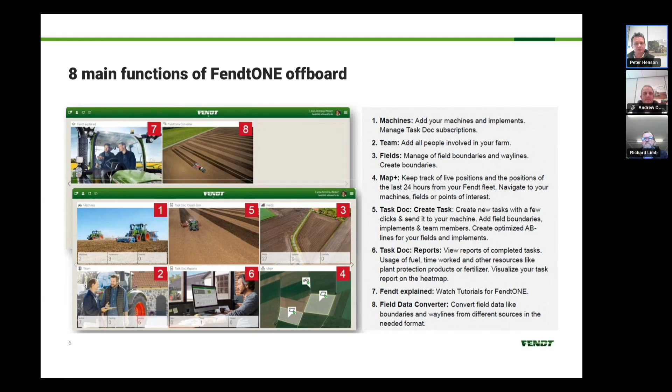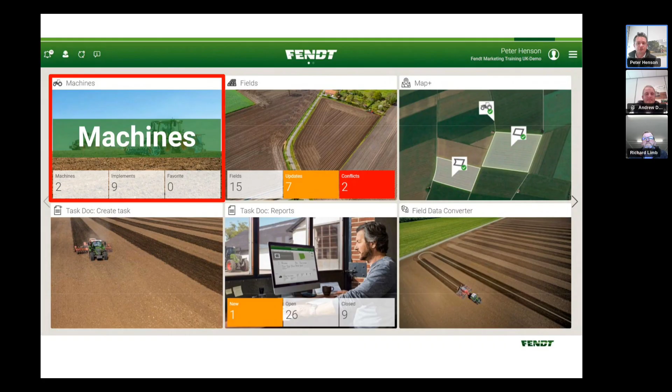So if we take a bit of a dive in, we'll have a look at our machines tile. As I said, in the machines tile we're not just seeing our Fendt machines, we can also see the implements. In this screenshot here we can see we've got two Fendt tractors. I can see they're connected to the telemetry system, so I can see their current hours, their fuel level, and their AdBlue.

We also can see we've got some implements in the list. Down the side we have a few buttons where we can import or filter out any of the data. If I click on one of the tractors, I get an overview of the tractor data there: serial number, when it was manufactured, and again the hours on the machine. We can see that data.

Along the top there we have some tabs, so we can look at whether we've got any servicing or warranty contracts on there. Down the side we have 3 buttons: one with the star, so you can set that as a favorite. Then we have the middle button, where we can actually click in and go see the live location of the machine. And the third button down is where we can hot link into the telemetry website.

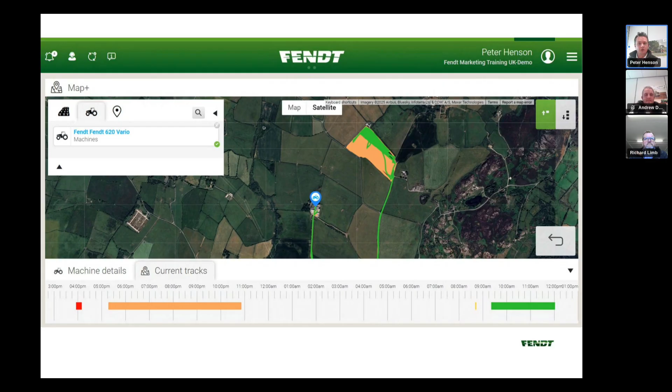For the implement side of it, this is where we can build up this database for our implement. Ordinarily this data would live on the tractor terminal, so this just means we can have security of our information. If the tractor gets traded in, we've still got all the implement data there.

Hidden, contained within the implements, would be information such as the guidance offsets that the operators have put in there. So that can all be held in the offboard portal, and this can be shared with other tractors, so only one operator has to do all the working out of their implement offsets. They can share that with other tractors. As tractors come and go within the fleet, this information is held, and we can then share that back out.

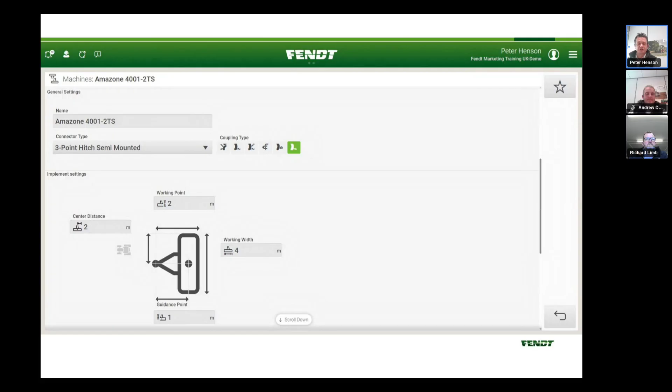Probably one of the real big tiles to look at then would be the fields tile on here. So when we're looking at this screenshot, we can see the number of fields we've got, but then we see these two other options that say updates and conflicts.

Conflicts is when we've got one field, but there are multiple boundaries for that field, because it could be the situation where we've got 2 or 3 tractors. They've all individually gone into a field and recorded their own boundaries, but it's all under the same name. So this would be displayed as a conflict, and it just means then that we can manage those conflicts. We can choose which is the correct boundary for the field, get rid of the other boundaries, and then share that one boundary back out to the remaining fleet. So again, we're always working off the same boundary.

The other bit of information is updates, and this will always relate to way lines or obstacles within the field, and it's then how we choose what to do with those.

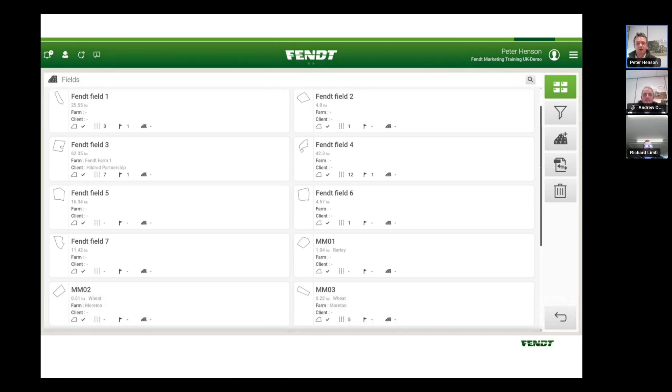So when I go into the fields tile, I see the list of fields that I have in there. I can see whether there's any updates for those fields. I've also got the option to add a field at that point, whether it's importing data off a USB stick, or even if I wanted to manually draw around a field, I could add that one in there.

But when I click into the field, this is where I can start to manage some of the field related data. So when it comes to managing the way lines, any new way lines will come through as an update, and we can choose how we manage those updates. I can either accept or reject those way lines, and it means when we share this data back out, we should be overwriting what's already existing on a tractor and removing any way lines we don't want, such as some of those temporary ones that were just done for a basic cultivation.

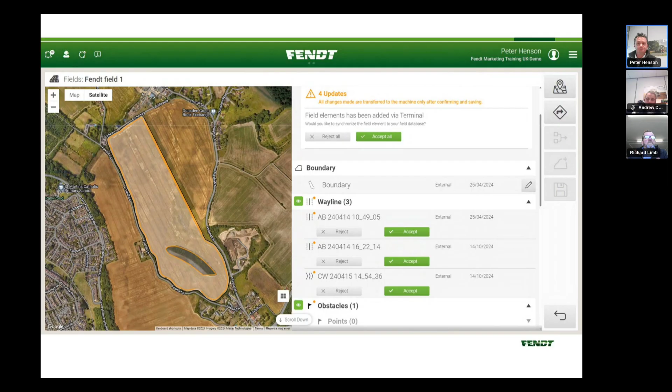But also within there I could edit the field boundary if I wanted to, so we can see all the various recording points as the field boundary was recorded the first time round, and we can push and pull those markers in or out if we want to alter the boundary.

I can also, for any of my preferred way lines, if they've just been left with the standard naming structure that comes on when the tractor's created the way lines, if the operator hasn't already labelled it up, there is the option to click on those way lines and actually edit the name, if that's going to become a permanent way line that you want to always use.

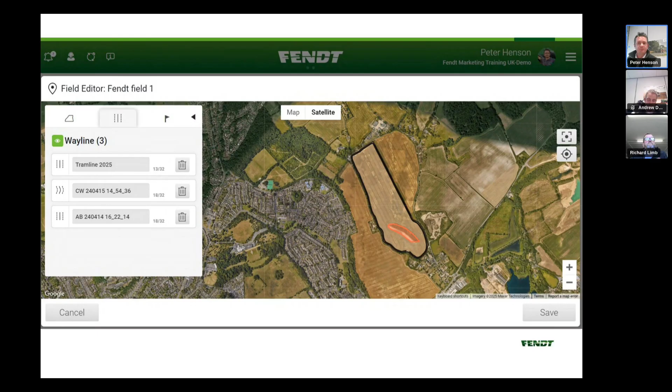And then also in there we can choose where we want to add in any obstacles, whether that be a point obstacle, a line obstacle, or mark any areas, whether it's a wooded area or a pond. Much like how we create boundaries, we can draw around those sorts of obstacles and share that back out with the tractors as well.

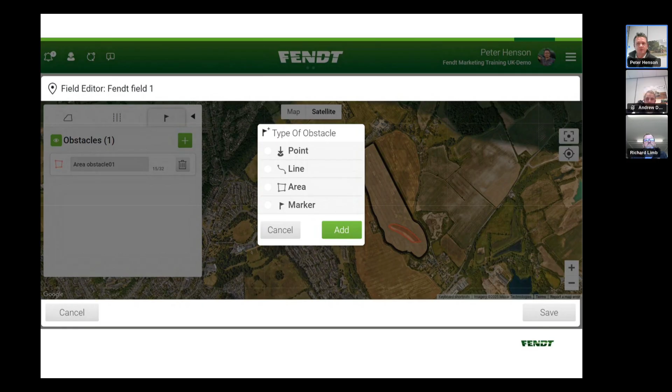And again, if a tractor's recorded this data, we can manage it. So if they've dropped markers or points within the field, we can choose how we manage those. It just means that if one tractor's added a feature into the field, it's another way that we can quickly share this information out with the rest of the fleet.

In here is where we can start to capture some of the information as to when we're out working within the field. So as I said, we could either have a two-way conversation with the tractor out in the field. If I'm having that two-way conversation, I'm coming into this create task tile, and it's a really straightforward process as to how we capture that data.

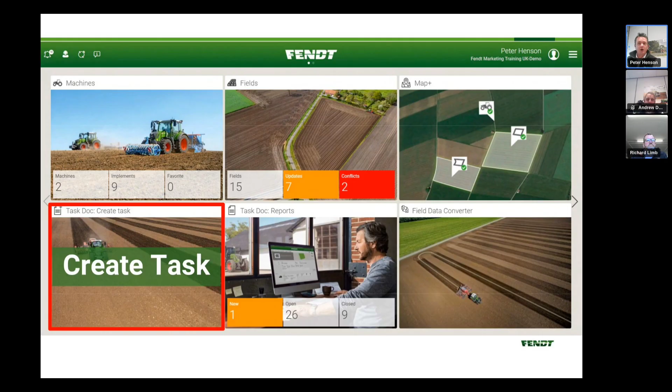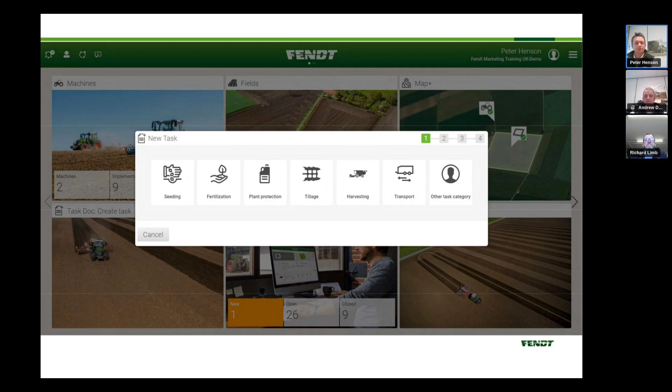Usually the first thing it's going to ask me is what type of operation am I going to do? So I'm picking out of the list there, or I could go to choose another task category. What it does then is just starts to filter out the machines and implements that I see in the next stage.

So depending on what I've chosen, if I choose the tillage task, it's only going to show me tractors that are in the list there. So if I've got a rogator or an ideal combine in my list, they wouldn't be shown, because they wouldn't be related to a tillage task. And then I can see all my cultivators as well. So I can make the choice as to which tractor I want to send my task to, what implement is going to be used, and then I can select various fields that I also want to add to the task as well.

When I advance from there, it asks if I want to tag a crop to this particular task, so I can either choose to add a crop there or skip past this step. The final step brings me to a summary page where I can see exactly what I've chosen for my tractor, the cultivator or machine I've selected, and the field.

At that point I can choose to edit any of the information there. I can also change the naming of the task so it can easily be identified by the operator, and I can add in any notes I want to send out for the task - whether it's to work fields in a particular order, or start at one end of the field and work in a particular direction.

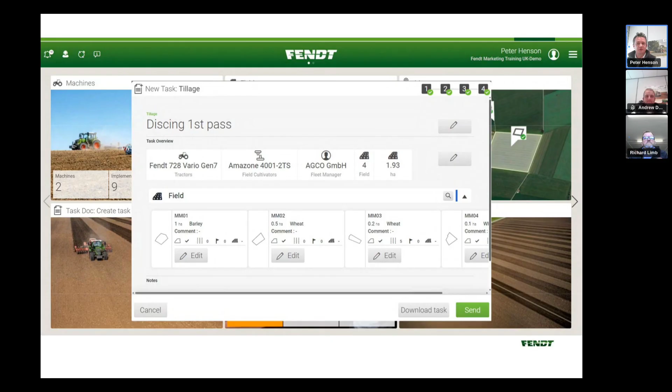But ultimately, once the tractor has finished the job, we want to get that data back. So regardless of whether we've created the task on the portal, or the operator has manually created a task on the tractor screen, when they've completed that task, what they do is what we call 'book it' - that closes the task off on the tractor screen and sends the data back to the offboard portal.

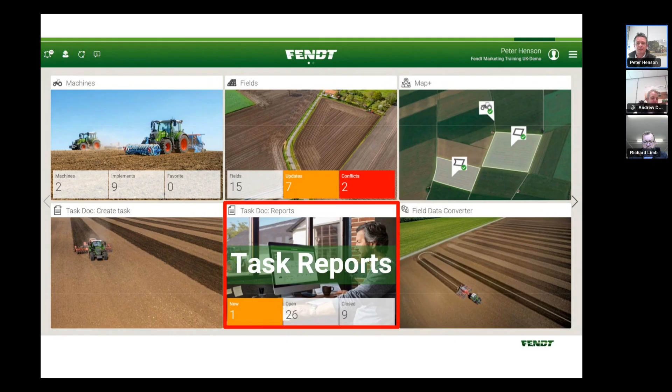So in here I can see whether I've got any new tasks - they come through as a little orange box saying how many new tasks I've got there, and then I can click through and see what data I have.

When I come through to my task list, I see all the jobs that come through, and any new tasks would appear at the very top of the list. On this side I'll have a report per field.

When I click into one of those reports, I've got all the basic data that the tractor has recorded - the field, the boundary area of the field, the start time, the stop time, and the date the work was done, both when it started and when the job was closed. Sometimes some jobs might go over multiple days.

More importantly, I can see what the tractor has done - for example, in this particular field it's worked 4.1 hectares. I can see how efficient the tractor was, how much of the time it was effectively working, and what my ineffective time was - usually ineffective time is turning on the headlands, or otherwise not working. I can also see how much fuel was used in that job.

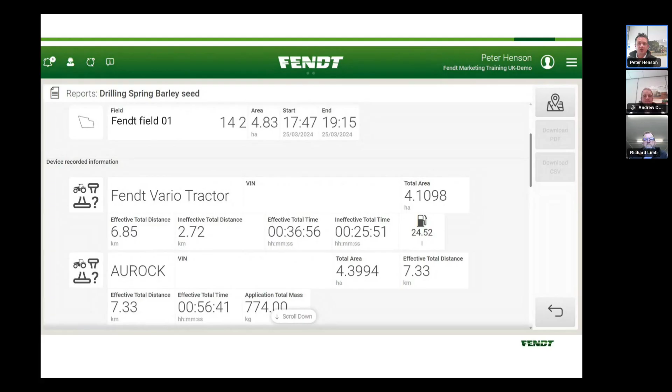Within that information, I can create what we call heat maps. This pulls out from the task details as to what's been done, and it will show me a variety of tractor information. So here I've pulled up fuel consumption for the tractor, and as an example, I've picked up some of the Isobus information from the drill that was used.

We can display these two maps side by side if we want to, and again we can zoom in on there, and start to maybe look at any features in the map that we maybe can't explain.

So for instance, looking at forward speed, if I knew the tractor was working at a consistent speed during cultivation, are there any spots in the field where it all of a sudden slowed down for an unexpected reason? Those areas of the field might want a little bit more investigation.

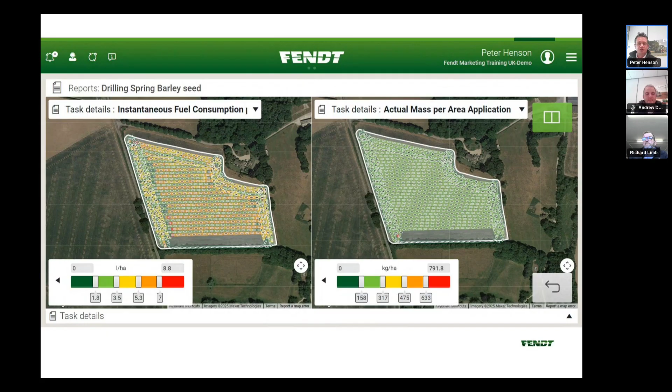Once I've captured that data, I can choose to export it if I want to. When exporting the data, I can choose what format I want to export it as. So I could choose a CSV file, and this would put all the data into

an Excel spreadsheet. I could ask it to create a PDF, and it would just replicate basically what we've seen on screen and put that into a PDF format. Or I can export it as ISO XML, so that would be the original raw data being exported back out as an electronic format, so that if it wanted to share with another system, that data is also able to be exported back out.

But essentially, when I want to export the data, I can go about this several ways. I could either ask it to select everything in the list by hitting a select all button, and then it would obviously export everything out. Or I could put in a search term to look for something specific, or I could apply a filter, getting a little bit more specific as to what I'm exporting.

But if I was to look at, say, a CSV export, if I choose to export that data, it will put everything into an Excel spreadsheet. I can see all the raw data values - time, fuel used. If there's an Isobus input, product applied as well - then I can start to do a little bit more analysis of the data for particular jobs.

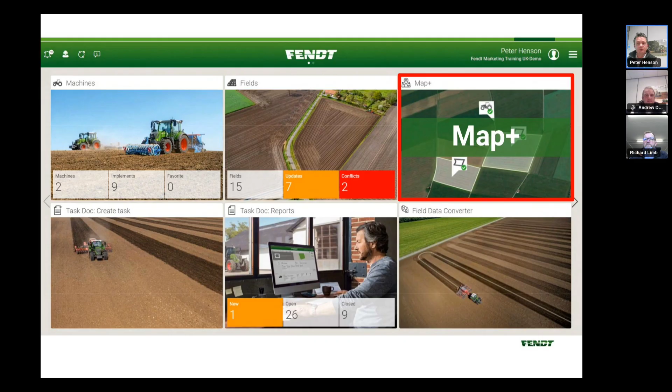Within there, just to help tie things together, we have what we call the Map Plus tile, and this will pull everything together. So when I go into the Map Plus tiles, I can choose whether I want to display the fields, or zoom in on any particular tractor as well.

Or I can add specific farm features into the map, whether it's a particular pad where we want to be tipping muck or sugar beet, for argument's sake - we can map those sorts of things onto the portal. It just ties everything in together. So in this example, when I select the machine, I can see exactly where it is and where it's travelled as well.

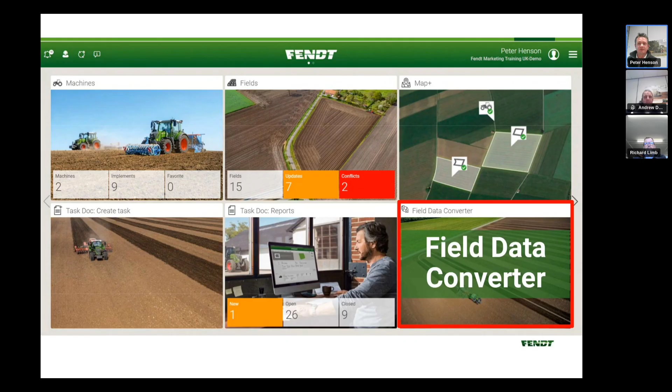The last tile I'm going to quickly touch upon is what we call the field data converter. In this tile, this is where we can import data from other guidance screens, so to populate the offboard portal we don't have to have data straight from a Fendt tractor. If we started off with a competing brand or a competing guidance system, we can actually look to import that data and convert it as well. It's quite a simple process.

I just browse to where I've got those guidance files, import them into the offboard portal, and then it will ask me what I want to convert them to. So I can convert data for other guidance systems as well, and share that back out via USB stick. So if we've got a multi-branded fleet, this is a way that we can share boundaries and waylines between different brands.

So that's a very broad overlook at the FendtONE Offboard system. I've picked the main points, the main tiles, of how we can manage our implements, manage our field data, make sure machines are using the same waylines and boundaries. But also how we can quickly and simply capture the data - when the machine's been into a field, how long it's been there, how much fuel it's used - we've collected that data and put it into a simple report.

But what I'm going to do is hand back over to Andy and Richard. They'll discuss how it's working for them.

We just want to look at the system and what terminals are compatible with the FendtONE offboard system. It's not just for the new tractors, it's anything with the NT01 10.4-inch terminal on it. Traditionally we'd have seen this on the S4 tractors, so the 500 series, 700 series, 800, 900, 1000 series - Profi Plus tractors - they would all have had the 10.4-inch NT01 screen.

We can activate those screens for the over-the-air transfer of data, and they can sit on the FendtONE Offboard portal as well. We can also bring in the MT tractors - they can also sit on the portal, as well as the Ideal Combine and the Rogator self-propelled sprayer, because they're all running the 10.4-inch NT01 screen.

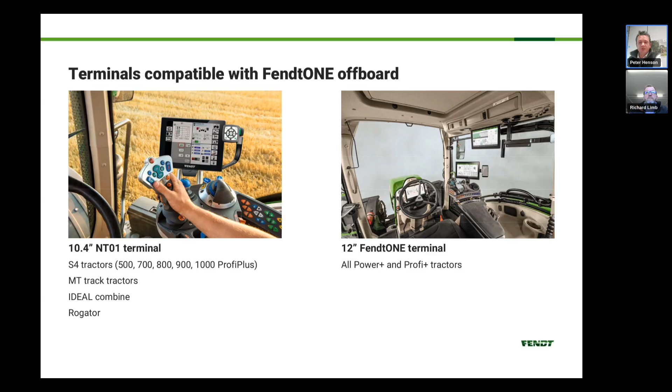Any tractor now with the new armrest, the 12-inch FendtONE terminal, if we've got guidance on the tractor - so a Power Plus or Profi Plus tractor - again those machines can sit on the FendtONE portal and transfer information. Through the portal we can move information from old screen to new screen and new screen to old screen, all over the air, making sure all operators and machines can benefit from the up-to-date information available to them.

In regards to machine requirements, what do we need on the machines themselves? One, we just need our guidance system there - whether that's a Novatel or a Trimble receiver, it doesn't really matter which receiver we have on the tractor, as long as it's running Fendt guidance. Then we can add those tractors into the system.

On the tractor itself it just needs a bit of software on there, ordinarily what people might refer to as VarioDoc Pro. It's recently changed over the last few years to be called the Agronomy Basic Package. Essentially that's pretty much been standard on Profi Plus tractors. This is what enables you, before FendtONE Offboard, to transfer data to and from the screens using a USB stick, and it's something that might need to be looked at on one of the newer Power Plus tractors with the 12-inch FendtONE screen, because some of those might or might not have been specified on build to have that particular software.

To enable the over-the-air transfer we need a SIM card with a data plan. If you've already got a SIM card in the tractor for your guidance signal correction, so NTRIP, we just piggyback off that particular data network. If we're not using NTRIP, then any SIM card with a data-only plan, or what we call an M2M SIM card, would suffice to enable the over-the-air transfer.

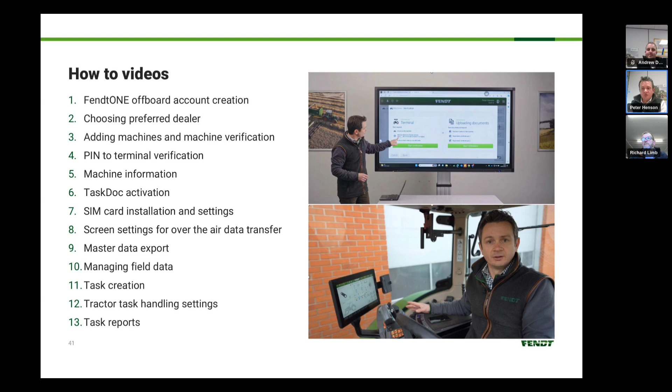So with that, what we'll do is move into this question and answer. We've seen some come through the chat, and we'll try to answer a few of them.